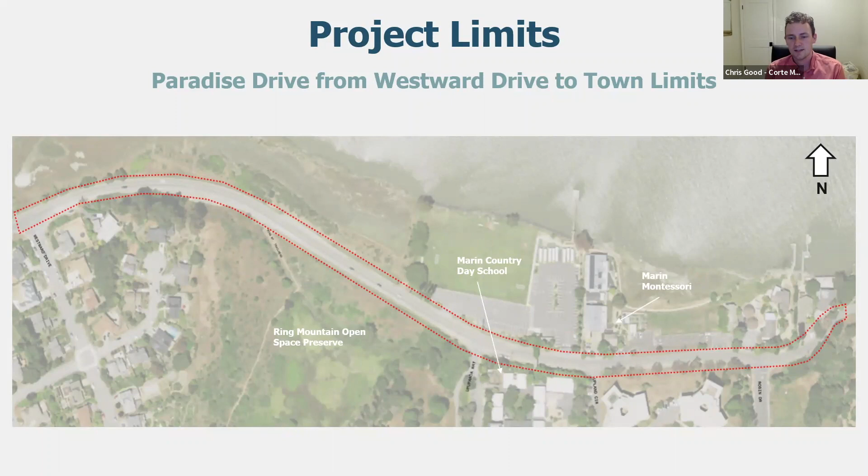Next slide. So here's the project limits. On the left side of the screen, which is to the west, you can see Westward Drive is the start. And then we have the trail access to Ring Mountain Open Space, the two schools, Marin Country Day School and Marin Montessori. And then just east of Robin Drive is the eastern town limit, which will be the end of the project. And I will pass it off to RJ.

Thanks, Chris. One of the key things we want to focus on today is we started this Paradise Complete Streets project with the town's bike master plan in mind from 2016, but as part of the initial round of introductory workshops, we've heard some concepts, primarily a potential path on the north side that is contrary to that master plan. And we felt that alone was a significant piece to discuss with BPAC.

And so that's one of the things that we'd like to get your feedback on, and obviously show you all the information we have to date so you can make some informed decisions. But really that's one of the overarching goals.

And then beyond that, we will also dive into some project specific details. But since the last set of workshops, we have done some right-of-way analysis and existing conditions evaluations for the portion that is from Westward back to our recently widened sidewalk at San Clemente, to really understand what that might look like from a whole comprehensive corridor perspective. And so that'll be part of our presentation.

And with that, I'm going to turn it over to John Gibbs.

Okay, great. So kind of zeroing in on our goals for this evening, just putting a little finer point on the previous introductions, we got 4 goals. The first 2 really kind of go together and align to our presentation pause, where we'd really like to have a discussion before we move forward with the second half, as RJ had explained.

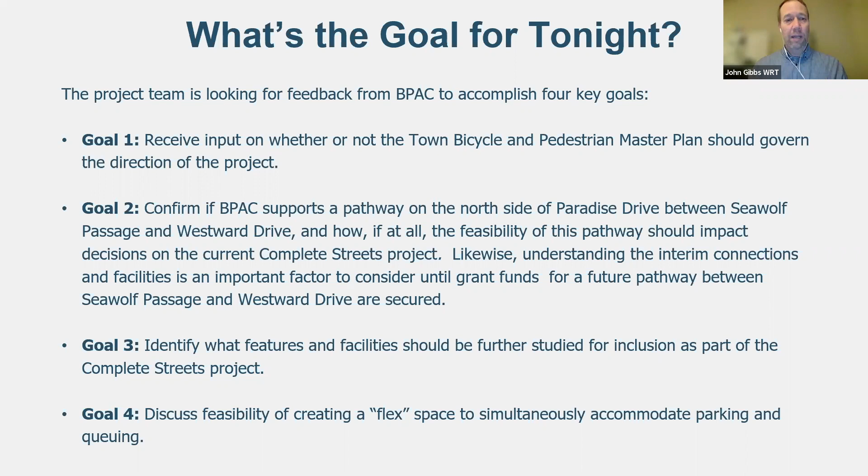Becky is going to talk us through the existing plan and move right into some of the feasibility studies.

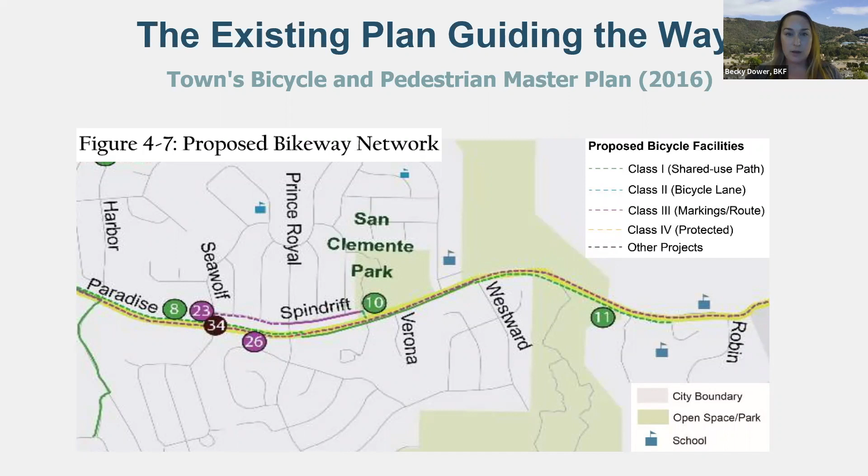As RJ had mentioned, when the town and the consultant team started to visualize what this current Complete Streets project looked like, we naturally went to the town bicycle and pedestrian master plan. This image is an excerpt from a larger exhibit titled The Proposed Bikeway Network. Through this series of colored dashed lines, the authors tried to illustrate what they thought the appropriate bicycle facilities would be and where they would be located.

Let's dive into this as it pertains to our direct project corridor and the corridor to the west that the public has expressed interest in. Starting at Seawolf, the master plan shows a dashed green line representing a Class 1 facility on the north side of Paradise Drive, spanning from Seawolf to just past Prince Royal. At Prince Royal, the solid green line runs all the way to Westward, representing the existing Class 1 shared use path already constructed on the south side of Paradise Drive. As we move westward, the westernmost portion of our Complete Streets project, the plan illustrates a Class 1 shared use path on the south side of Paradise Drive.

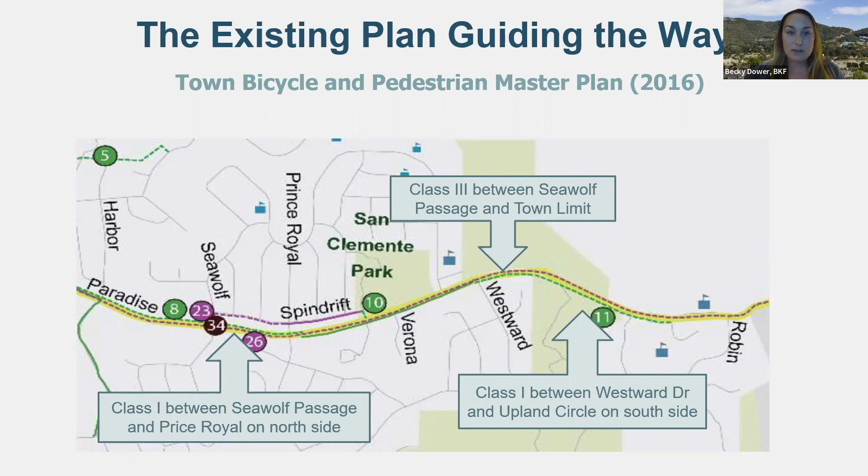So the project team has been understanding that we would defer and look to the master plan for guidance. We've been using this as a baseline for our understanding of the project to date, and also as the guidance for our messaging to the public so far.

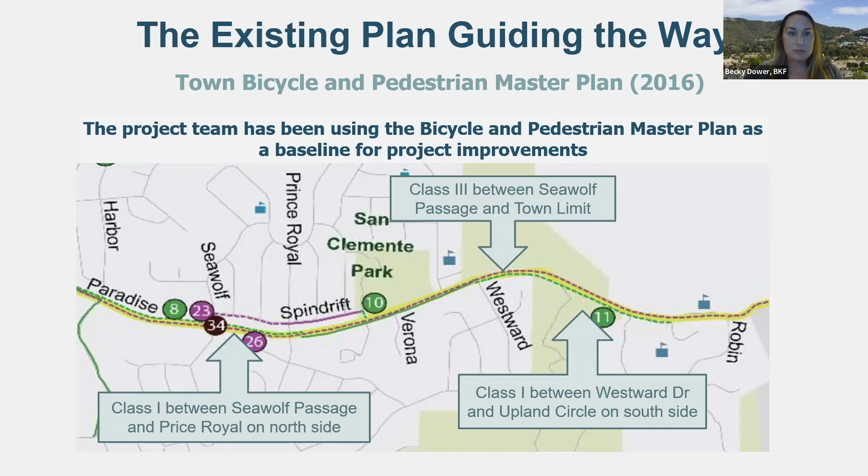All right, I'll hand it back to RJ here. I think this was going to be me.

As part of this project, we had a pretty good process over two meetings. We had about 50 people attending, especially at the second workshop. We got a lot of good feedback and really got the word out pretty successfully. Thanks to many of you for helping reach a nice audience. I think in the end we were really able to do that.

Some of the feedback we received zeroes in on a couple of key points. First, we heard a lot of support for more recreational and school-age kid focused bicycle access, essentially removing that from the street and putting it onto a shared path. There was more support for a shared path, like a Class 1, as opposed to dedicated Class 2 bike lanes. Instead, a widened shoulder and adequate space within the roadway was adequate for many of the cyclists. I think we heard that pretty loud and clear, and we want to confirm that tonight. That helps us move forward with our alternatives.

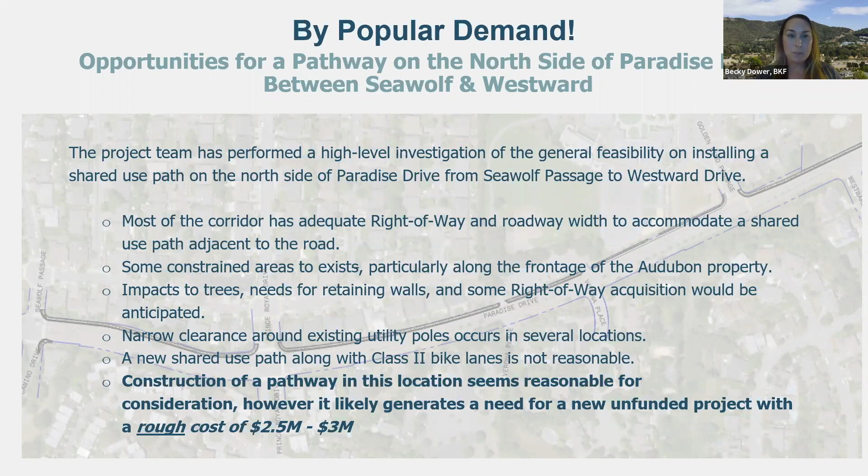Now on to some of those opportunities and constraints. This slide focuses on one particular block on this corridor. To help you get your bearings, Prince Royal is to the west or left here, and Verona Place is off screen but opposite the new pathway somewhere down over here. You can see in this street view, this is that existing class 1 pathway on the south side of Paradise Drive, which is also represented over here.

These dashed blue lines you see on either side represent the right-of-way. So we have ample right-of-way in this location, but we do consider right-of-way to be sort of a hard stopping point, just due to some of the timing and cost implications of trying to get additional right-of-way.

Depending on how big your monitor is, you may or may not be able to see this section view. This shows a clear width between a new curb and existing curb of 28 feet with this 8-foot pathway in place. What 28 feet can really mean for us is 2 11-foot travel lanes and 2 3-foot shoulders. This is certainly wide enough for 2 vehicle travel lanes and shared use with cyclists. What this is not wide enough for, however, is that 8-foot shared use path, the travel lanes, and dedicated class 2s. Some of the challenges here have to do with grading.

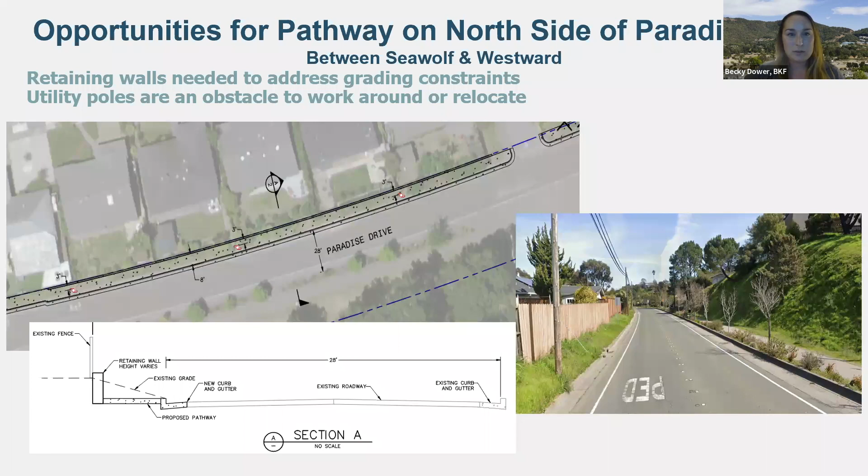Let's move east a bit to talk about another constrained area. So for your bearings, this is Golden Hind over here, and Westward is off screen to the east. This is our most constrained area in terms of right-of-way.

So that dashed blue line we were talking about earlier, you'll see here along the Audubon frontage, that right-of-way line actually bumps out several feet. What that means for us is if we honor the right-of-way line and keep the path within the public right-of-way...

...that our clear width available for vehicle travel or other on-street uses necks down to 22 feet. This is a rather short span of necking. We see probably about 150 feet as we head east of here that the right-of-way really starts to open up again, and we get a much wider corridor. But for that about 150 feet, we are somewhere down below 28 feet wide and as narrow as 22 feet.

So if I were to lay out this hypothetical road section for you again, this really represents two vehicle travel lanes with no shoulders. That is still potentially adequate for vehicle travel and for on-street cyclists in a class 3 situation with sharrows. Certainly not adequate for class 2s.

This configuration doesn't have a lot of other conflicts other than right-of-way. We're clear of major utilities. There are some vegetation and trees, though, that will be impacted, not just on this segment, but on many of the segments. The trees of note appear to be bay trees, quite large, as well as some vegetation behind the residences there.

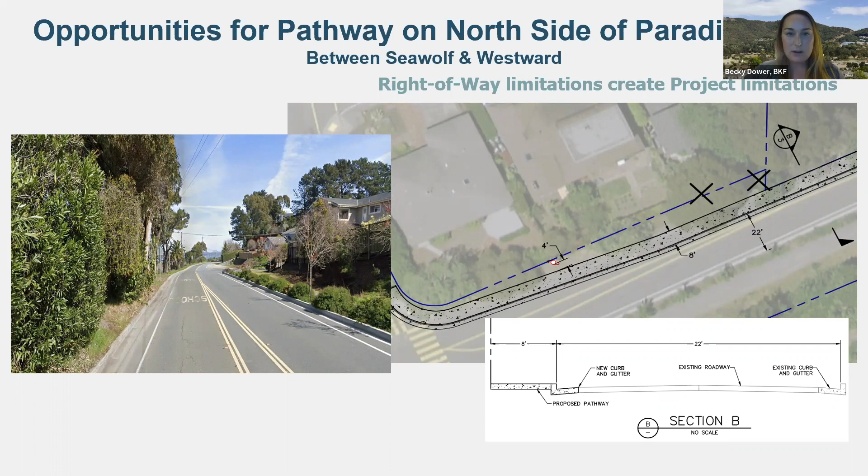Great, thanks Becky. So I wanted to stop for a second, and as we think about the ultimate goal, we have to think about sequencing and phasing of how it all looks over the next 10 or so years, getting to that ultimate goal. This is kind of a similar drawing to the master plan, but has a little more detail in the form of these aerial drawings, highlighting certain things I'd like to point out.

So obviously we have this class 1 path here on the south side between Prince Royal and Westward, and that's already there. On the far left of the screen—I don't know if you can see my arrow, maybe Becky can point it out—right there, yeah, we have the sidewalk that we just built.

If we were to follow the master plan, we would really have just this one section here between Seawolf Passage and Prince Royal that would more or less be a gap closure. One more section to the left.

Now, if we start talking about a north shared path, in addition to what we have in the southern path, we're now talking a much larger section of path that previously hadn't been envisioned by the master plan. Anytime you have a new facility, you have a new cost, and that just hasn't been folded into any budgets to date, which is definitely important to discuss.

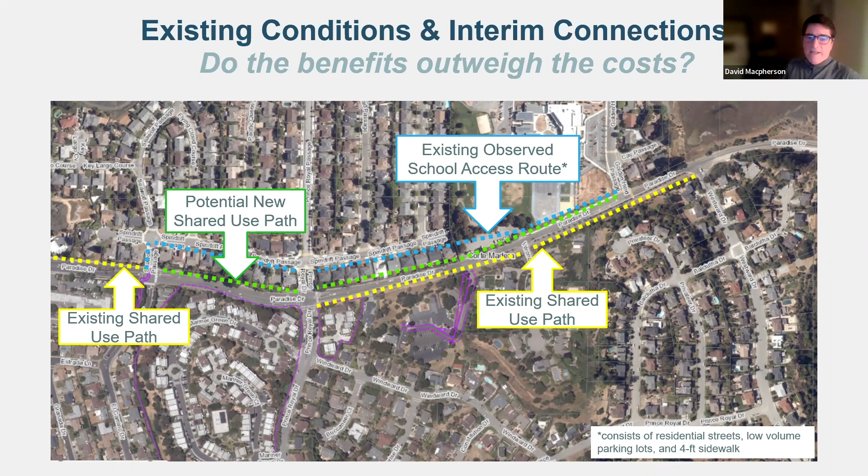So I'm looking at this really with the vision of, as I say, swinging for the fences, and assuming that we could design this as if we didn't have the current as-built existing shared use path. I would simply put a traditional sidewalk on the south side and have a grade separated multi-use path on the north, that would connect all the way to the ferry building.

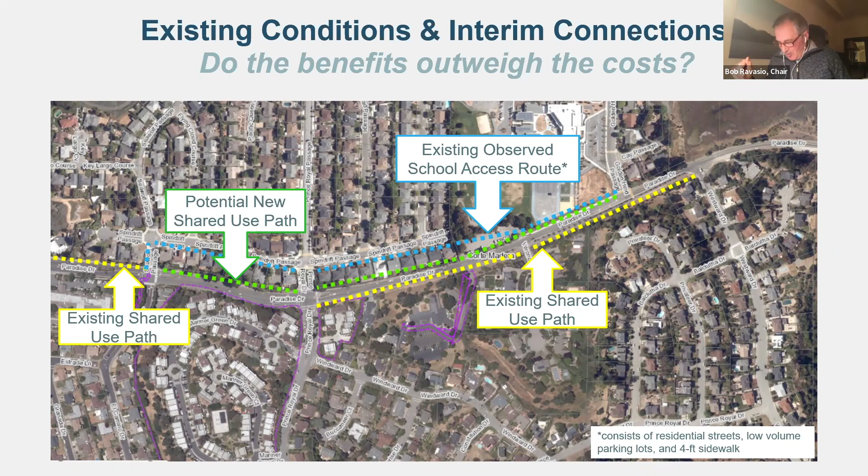Any other members of BPAC want to say anything at this point, or it's clear we don't have a consensus here, I think. Kirby is saying the south side is still the way to go, he thinks in his mind.

Wait, Cheryl, did you want to say something else? Your hand's up again. Well, I guess I agree with David that if we were starting from scratch, we would consider the path on the north side. And I also agree with Kirby that I don't think we want to get rid of the path, the short segment on the south side.

And so the way the question is phrased, I think, does the master plan govern the direction of the project, or should the path on the north side of Paradise Drive be explored? I guess some of my negativity about it is that I want to get to see the west end. We have money for that.

We have a grant. Some work has been done on that. And if I don't understand how we're, how the question about the north side, which is really we're talking mostly on the west end of that, I'm still a little bit confused about that, if we say yes, we should consider the path on the north side. How does that impact what we've been talking about of the frontage from westward going east?

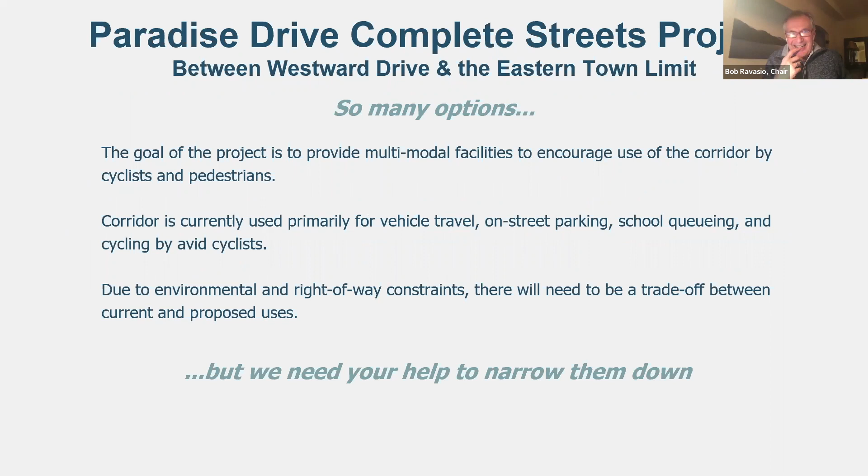Thank you. Should we jump into the remaining presentation, Bob? Yeah, it's got to be easy from here on in, right? Yeah, right. Becky, you want to take it away? Yeah, it looks like we lost John. He had another commitment.

As with the section we just talked about west of Westward, as we focus on our specific Complete Streets project between Westward and the eastern town limit, we find there are many options to consider, and that's where we really need your help, to whittle down the options we should be looking at as we move forward with alternative designs. So just to recap, the catalyst of this project was to provide multimodal access to Paradise Drive, so we're looking at pedestrian and bicycle improvements to this segment of the corridor that's largely devoid of any bike or ped improvements. Right now the corridor is used for vehicle travel, and there's also quite a bit of on-street parking and queuing used in this stretch.

The street is used by avid cyclists, and as a member of BPAC mentioned previously, a lot of these cyclists aren't necessarily part of our target user group for this project because we anticipate they're going to continue to use the roadway despite any facilities that we might build for bikes or pedestrians.

We do have constraints—right-of-way constraints, environmental constraints, particularly along Audubon where there's salt marsh. There are constraints limiting what we can do out here. There's a lot of users, a lot of potential users, but a limited area we can work in. So there will certainly be a trade-off in terms of what we can accommodate. That's really where we need help from this group—to figure out how we should weigh our options and what trade-offs we should make.

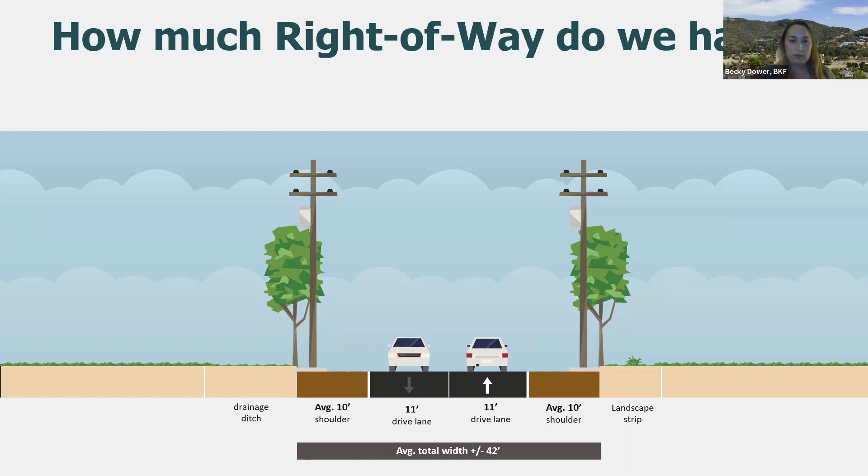Keep in mind, this graphic does illustrate the power poles that we see on the corridor. There are power poles at least down one side continuously, and in many areas there are power poles on both sides of the road. So we have somewhere around plus or minus, mostly minus 10 feet on either side of the road to work in. That's a good amount of space to do improvements, but again there will need to be a trade-off. It's not enough space to give all of our users the facilities they're looking for.

So let's start by talking about some bike and pedestrian improvements. We've heard loud and clear during our public workshop, and as we've been informed by the Bike and Pedestrian Master Plan, there's a very strong preference for a shared use path or a Class 1 path. Just to clarify, so we're all using the same vernacular: a Class 1 path is separated—there's a physical separation from the roadway, typically landscaped or a barrier—and it's a path that can be used by cyclists or pedestrians. This graphic illustrates what a Class 1 might look like.

Shared use path is a little more vague of a term. It's essentially just a very wide sidewalk that can be used by cyclists and pedestrians. There can or cannot be landscaping between it and the road, and typically it's raised up on a curb. So essentially, think of it as a very wide sidewalk that can facilitate cyclists.

In addition to the shared use path or Class 1 facility, we're likely looking at implementing sharrows, or Class 3, for this segment. We didn't hear a lot of support for Class 2s, like dedicated bike lanes, and we didn't see that mentioned in the Bicycle and Pedestrian Master Plan. Since the current configuration doesn't include any Class 2 bike lanes, and avid cyclists still use the area, it felt appropriate to at least start by considering Class 3s or sharrows, like you see here, to accommodate those on-road cyclists.

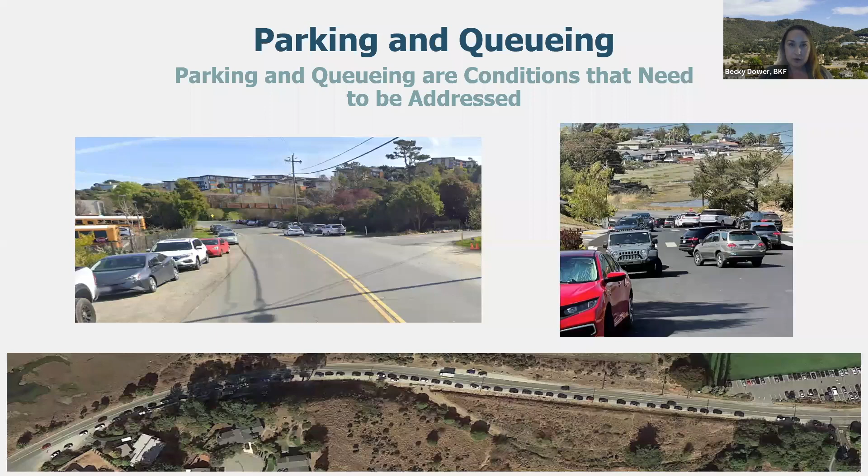And so for the immediate project, I think the BPAC needs to consider some sort of accommodation for some level of queuing, at least for the short term, to accommodate the schools.

So here's an idea I wanted to put in front of this group to get some opinions on ways we can handle queuing and parking. This graphic, just to recap, illustrates some of the typical queuing we see in front of the Montessori school, primarily on the shoulder, and then the typical queuing for the day school, wrapping around to the Ring Mountain Trailhead and over to Westward.

During public comment, we had heard a comment about the use of flexible use lanes or flex space. What this might look like for our project is a space that can be used for parking sometimes, and for queuing other times. The purpose would be to meet both of those uses without necessarily having to provide parking on the north side and only queuing on the south side.

So if I were to dial into an example of how this could potentially work, let's think about who the users would be and when they might use this area for their purposes. The queuing, as I mentioned, only occurs on school days during drop-off times in the morning and pickup times in the afternoon - pretty small windows of time.

A lot of the parking we see occurs on the weekends for patrons of the preserve, and also in the middle of the day when parents or other groups visit the schools and need to park off campus quickly as they run in. So there could be a nice trade-off for when these areas need to be used. Use of these areas could be controlled by special signage saying parking is allowed except for certain timeframes when queuing is expected to occur.

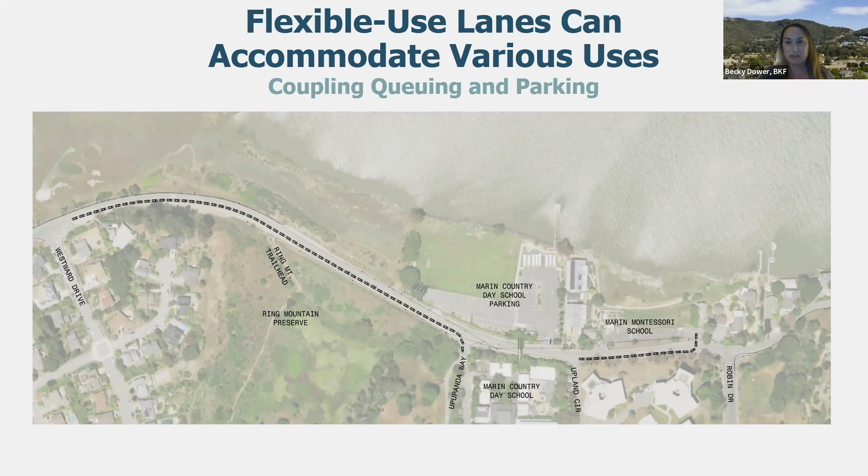All right, thanks, Becky. So this is basically kind of the wrap-up slide.

So we did want to focus in again on two questions of interest to get feedback from BPAC and the community. First, what bike and ped features and facilities should be further studied for inclusion as part of the Complete Streets project.

I think there's multiple things, right? There's queuing, there's parking, there's the multi-use path. I think we're going to assume travel lanes, but we're not going to get all of those. So you can answer: what's your top two priority? Which one do you not care for? Maybe that'll help build some consensus there. But we know something won't fit.

Secondly, should the project include programming for on-street parking that doubles as school drop-off and pickup and queuing? So really, is this an opportunity to...

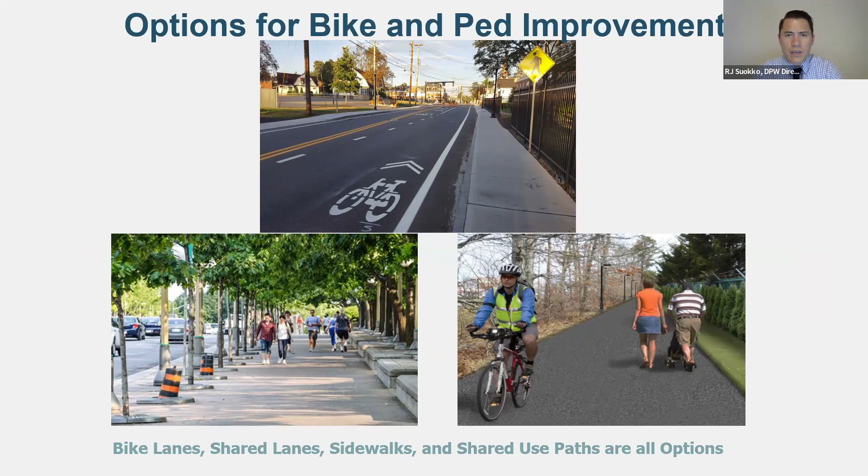Yeah, so going to maybe the right-of-way slide, Becky. We generally have on average, and I think it's good practice, it's best if you can have a consistent corridor. Right off the bat, we're losing about 22 feet of roadway for vehicles.

So you can put parking on one side and a multi-use path on the other, but then you don't have queuing. You could have queuing and a path, but then you don't have parking. Maybe get creative and you can fit a multi-use path and this dual-use parking queuing.

So that's kind of what we're seeing, and obviously it needs a lot more study, but we're just trying to see where that lands with BPAC. Of those, I guess three, which is the top two, and then should we try to come up with a hybrid approach to fold in that third?

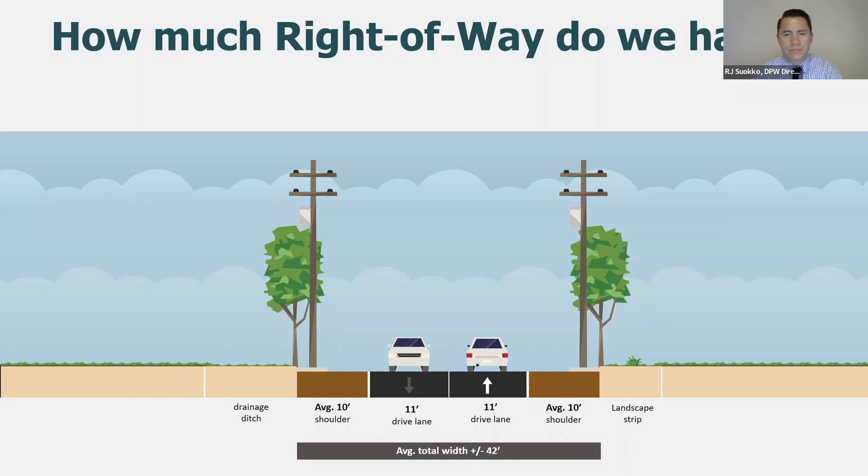Could you go back? Yeah, go back to the slide again with the goals. Okay, I don't know, maybe I just had a long day, I'm just trying to make sure I understand this.

Okay, is there any BPAC member who would like to address this, first off has comments on this or input? It looks like we have a couple. Dave? Maybe actually, let me clarify one more thing.

I think we all, the project was born out of having a multi-use or bike ped facility. So I think, and we've already heard that the community wants a separated shared path as opposed to class 2. So I think we have to assume, it's fair to assume that that's in.

So on the remaining side, it's parking or queuing or some sort of shared version of parking and queuing. And that would not be, that's not on the path, right? Correct, I just want to be clear about that. Parking and queuing, or are you saying the parking and queuing would happen on the path? The parking and queuing would be on their own side, separate from the path.

Yeah, okay, so the path would be on one side of the road and dedicated parking and queuing would be on the other side. Is that correct? Yeah, I mean you could also have them right next to each other, we could look at that, but they wouldn't overlap. They are separated. Okay, I was concerned because I was thinking you were implying that at some point in the day the path would actually be given up for parking and queuing. No. But you're not implying that.